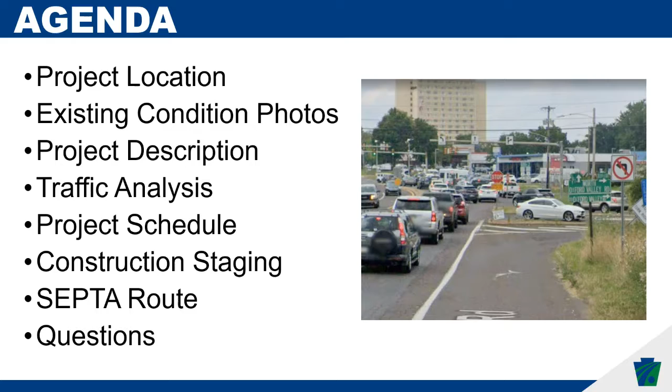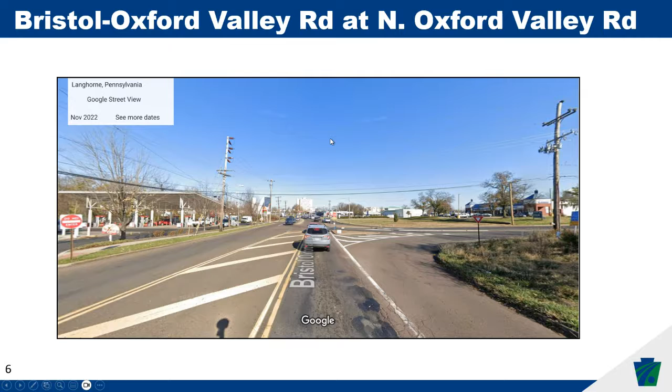This next photograph is Bristol Oxford Valley Road at North Oxford Valley Road, the southern portion of the project. For those familiar with this, Bristol Oxford Valley Road has a stop condition. You have Wawa and the beer distributor on the left, and additional buildings over to the right. Again, this is the same location, looking east down North Oxford Valley Road. This is the area where the majority of the work will take place. This intersection will be realigned, and there will be the creation of a new signalized intersection, which I'll show on the next couple of graphics.

So I'll go into a couple of graphics here that are blow-ups of this overall conditions plan.

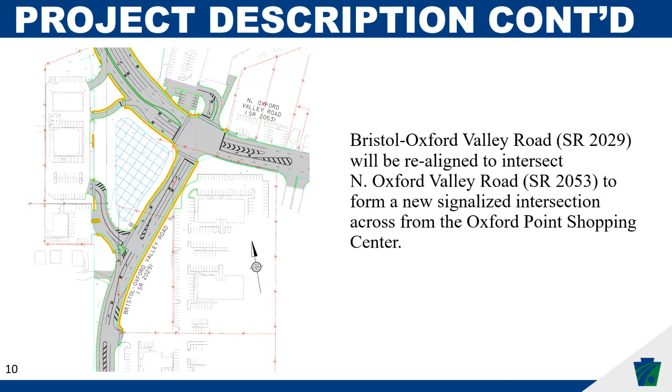Some additional improvements of the project include modification of curb radii and concrete islands, new curbs, sidewalk, and ADA compliant curb ramps. Existing traffic signals and mast arms will all be replaced.

Traffic signal improvements will utilize an adaptive signal system which adjusts the timing of red, yellow, and green lights to accommodate changing traffic patterns and helps ease traffic congestion. There will also be new drainage structures such as inlets, manholes, and pipes installed throughout the project limits.

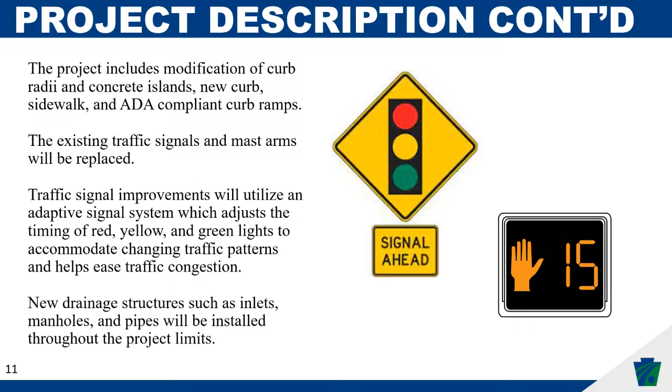Looking at the first intersection, Lincoln Highway and North Oxford Valley Road, in the existing condition during the AM peak, you experience a delay of approximately 32.6 seconds. This delay is an average across the entire intersection. There may be slightly more delay on one leg than another, but as an average you're sitting there for 32.6 seconds. In the proposed condition, it improves to 26.1 seconds.

In the midday peak, existing conditions, you experience a delay of 40.8 seconds, improving to 29.8 seconds. In the PM peak, existing condition, you would experience a delay of 42.5 seconds, improving to 31.9 seconds.

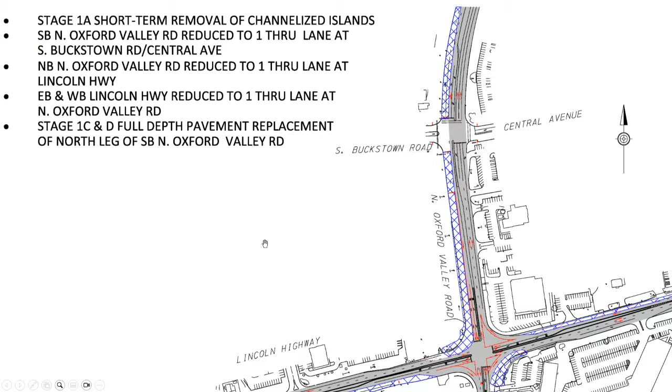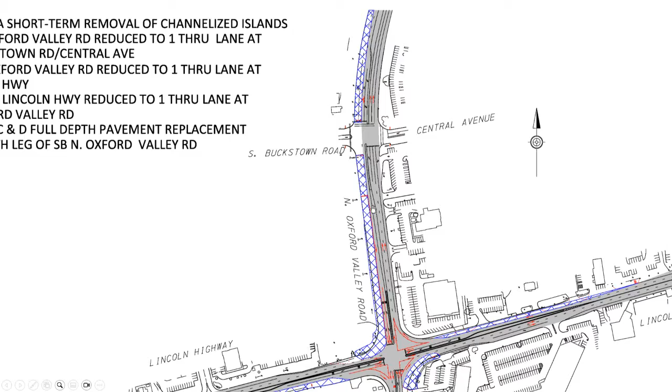Southbound North Oxford Valley Road is reduced to a single through lane at South Buckstown Road and Central Avenue. We're doing widening on the west side of the north leg of North Oxford Valley Road, and in addition to this corner, we need to drop one of the two through lanes to a single lane by the time you get to this intersection, carry it through the construction zone, and down to this portion to the south.

Because we're doing work on these corners, we need to reduce lanes in both directions on Lincoln Highway to a single lane through the construction zone. Approaching from the west going east, you drop to a single lane through the construction zone and open back up to two lanes once past it. Similarly in the westbound direction, we drop two lanes down to a single lane, carry that through, and open it back up once you get through the construction zone.

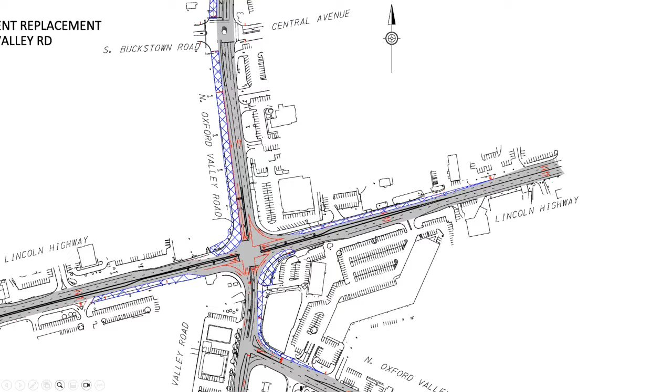Two other stages that aren't shown are Stage 1C and D. Looking at the northern leg of North Oxford Valley Road, there's a need to replace the pavement in full through this stretch, so there'll be single lane reconstruction going across the road. Those aren't shown here, but the traffic patterns will be as shown, with a single lane in the southbound direction and two lanes remaining in the northbound direction.

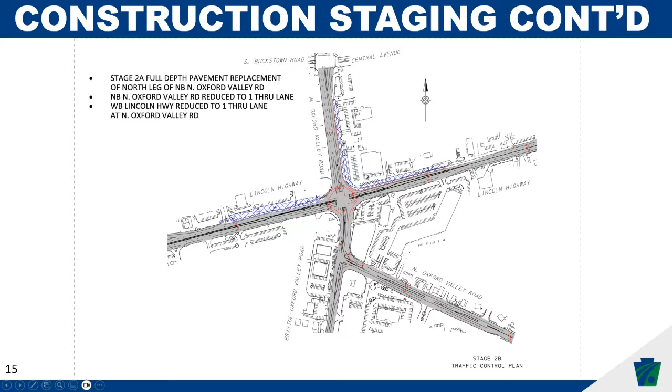Moving to the next stage, this is Stage 2B. Stage 2A is full depth pavement replacement of the north leg of North Oxford Valley Road. We have to finish out the widening of this piece of road, so there'll be a single lane here that has to get constructed before we move on to the widening areas to the east along this north leg of North Oxford Valley Road.

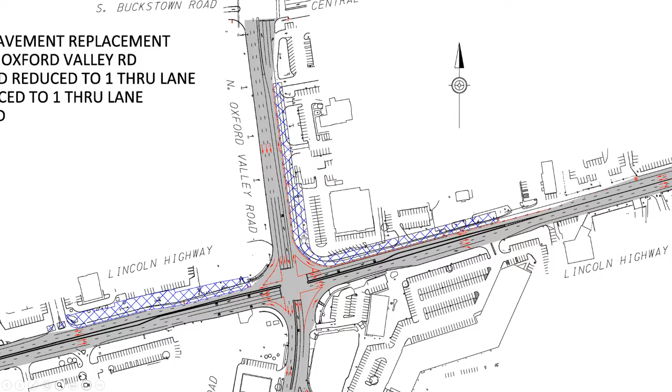We're also doing widening on the north side of Lincoln Highway. Similar to the previous stage, because of that widening, we have to reduce the westbound lanes to a single lane on Lincoln Highway through the construction zone, and as soon as we can, we open it up to two lanes, which continues as two lanes, similar to existing. The eastbound direction matches what's out there currently and will be during this stage, as will the southern portion of the project. No change to the traffic during this stage.

Stage 2C and D: eastbound Lincoln Highway is reduced to a single lane. Similar to the other stage where we were working on the north side of Lincoln Highway, we switch and do work on the south side, which requires us to drop this to a single lane through the construction zone, opening back up to two lanes. The westbound direction will match existing, with two through lanes through the entire construction zone. Again, there's no change to this east-west leg of North Oxford Valley Road and Bristol Oxford Valley Road, and this little piece of North Oxford Valley Road.

Stage 3 is our first short-term operation. What I mean by short-term is it's something the contractor can do at night. They would likely take one of the lanes next to the construction zone and have it back open by the morning commute. In this stage, we're removing the existing islands on Lincoln Highway and reconstructing new ones. The contractor will do what they can overnight, then put barrels back into their construction zone and open the lanes back up so that during the entire day there wouldn't be any restrictions of lanes during this stage.

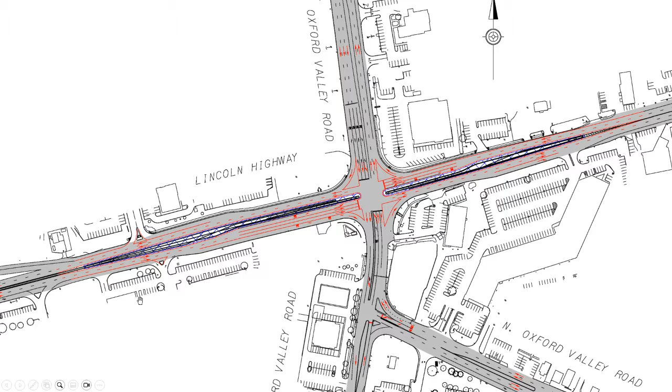Stage 4 is another short-term operation. This is where we're removing the existing median on the south leg of North Oxford Valley Road. Again, this will be nighttime work. The contractor would likely restrict around the construction zone and then have it back open by the morning.

Before I jump into stage 5, I'll say none of this is set in stone at this point. We're still working through our approval process on the traffic control.

Stages 1 through 4 will likely be done as part of the first construction season, and then we'll shift to the south portion of the project where we're doing the majority of the realignment for Bristol Oxford Valley Road and Oxford Valley Road as it connects to Lincoln Highway. That would be done during the second construction season.

As you can see here, there are significant construction zones. We're going to be realigning Bristol Oxford Valley Road as it approaches Oxford Valley Road, and then Oxford Valley Road will get built as it approaches Lincoln Highway.

The key point with this stage is that the northbound movement here, anybody trying to go north to get to Lincoln Highway, will have to be detoured. That's because of grade differences and width differences — we're not able to provide enough room to have dual movements of traffic through this.

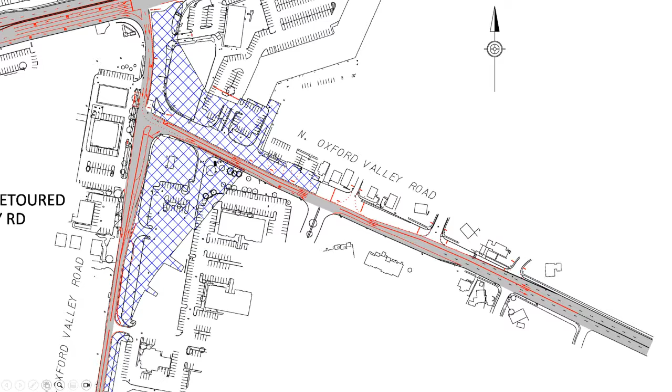Next stage is stage 6. This is again a long-term operation. By this point, we've already fully built out Lincoln Highway and the north leg of North Oxford Valley Road. We start to, or finish up, our work for the reconfigured intersection.

You can see here the reconfigured intersection, as far as the signalized portion of it, will be operational during this stage. It won't be at the full lane widths we'll have in the full build-out, but it will provide a signalized option here.

If I zoom in on some of these here, coming up Bristol Oxford Valley Road, you have a single left turn lane, a through lane, and a right turn lane.

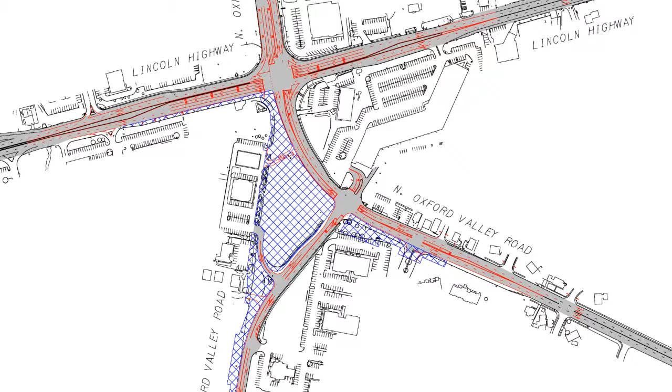I should also say that any commercial operation within the limits of the project will have access maintained through construction. It will be on the contractor to provide or allow access at all times, regardless of whether it's in front of a construction zone or not.

The last thing I'll point out on this stage is, even though we have the full width built on Lincoln Highway for this dedicated right turn lane going south, we have to barrel that off and not allow access because of the work we're doing on the corner. So the outside through lane will become a shared through-right turn lane to get south.

And then our final stage, this is stage 7. Again, this is a short-term operation that will likely be done at nighttime. You have northbound and southbound North Oxford Valley Road new median construction, new channelized islands construction in the middle of the intersection, and then final paving, striping, and sign installation will occur.

So if I zoom in on this to let you see a little bit better. Again, this is construction of the final medians on North Oxford Valley Road, the pork chop islands in the middle here, and then full overlay, any final pavement markings and signing will be installed as part of this stage. And just to rehash, stages 5 through 7 we anticipate would likely be in the second construction season.

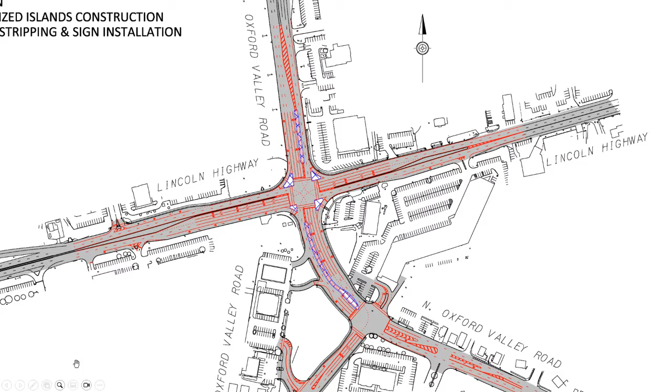As far as the detour timing or how long the detour would be in place during stage 5, I would anticipate that would be - going back to it here - stage 5 is because of the prevention of the northbound movement. I would anticipate that this will at least be in place for 3-4 months possibly.

We have had some coordination with SEPTA in the last week, and they have told us that there is a possibility this route will not be in operation as of 2025. They're still working through some detour details. There's low ridership on this particular route. They did say the route itself would not disappear - they would go to an on-demand route, and they're still working on the details of that, as far as where those stops would be. But as long as this route is in place during construction, we'll make sure we maintain all the bus stops that are out there.

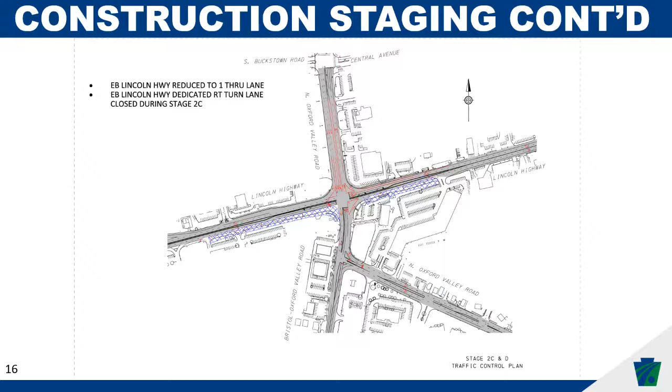So the first question is, how many construction seasons will the project take? Okay, Brian, so you published that one? There you go. Yep, so I'm not going to go through every question that has scheduling - we'll just kind of go through that whole schedule question, so I'm not ignoring your questions. Right, so this is on. Yeah, sorry, go ahead. This is on slide 13.

So just to rehash this again, we anticipate that this project will be over 2 construction seasons. We anticipate construction starting in early 2025, lasting through at least October timeframe, depending on weather. Sometimes that can last longer, depending on what the contractor needs. So we anticipate that construction will last for 2 construction seasons.

Okay, thank you. So it would basically be starting really at the beginning of 2025 and ending at the end of 2026. Correct.

Okay, the next question - I know you mentioned there's a link to the slides in the chat, but I guess there's a question regarding whether there's a recording of this meeting. Yes, this presentation is being recorded and will be posted to the project webpage. So in addition to the materials presented during this time, like I said, this presentation is also being recorded, so you can rewatch it at your leisure. Thank you.

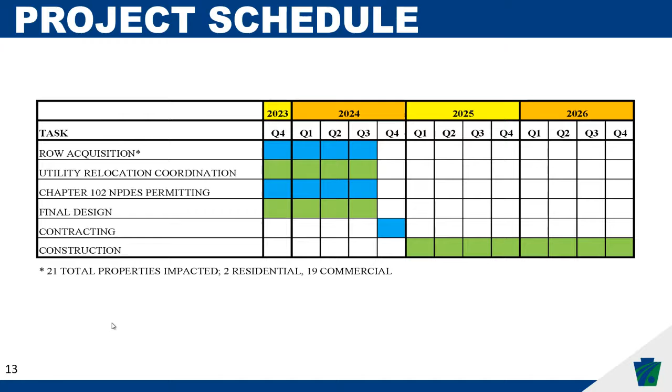Let's see, the next question is regarding the delay that you had posted at the intersections. Why can't we do away with the delay in its entirety? I'm going to throw that to Brian Keaveney, if you could help out with that.

The reason we can't get rid of delay, and Brian, please correct me if I'm wrong, is the amount of traffic we have. We're trying to optimize our signals to move traffic around as best as possible. The only way we could get rid of delay is if we basically got rid of the traffic.

I think that's a good summary, Brian. What I would add is the delay we're reporting is the average delay per vehicle that goes through the intersection, multiplied by several thousand vehicles, almost over 4,000 during the weekday afternoon peak hour. The reduction in delay is substantial when looked at over the total number of cars through the intersection. What this represents is that although many cars may free flow through these intersections, some will be stopped simply due to the nature of traffic signals always having one red phase.

So some traffic will be stopped, whether on the minor approach, major approach, or in the left turn lanes, at some point in time. That's what this average delay is a reflection of. Thank you, Brian.

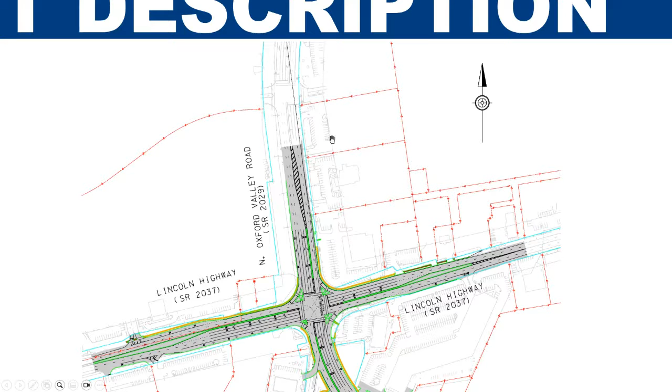Thank you, Brian. The next question is about access to and from Center Street for the residents. Asking if there will be medians preventing left-hand turns in and out of Center Street. Will emergency response vehicles be able to access Center Street from either direction without being impeded by medians and traffic blocking the street? Will there be dual left turn lanes for residents of Center Street and Oxford Crossing Liberty Drive? And will there be a 'do not block the box' painted on North Oxford Valley so that traffic is not constantly backing up from the new light, blocking the entrance and exit of Center Street?

I'll publish that. So it's kind of a lot of questions in one there. I'm going to zoom down so I can see the question. So Center Street—I believe Center Street is up here at the top, correct? Is that the location we're talking about? No, Center Street is just south of the new signalized intersection. Sorry.

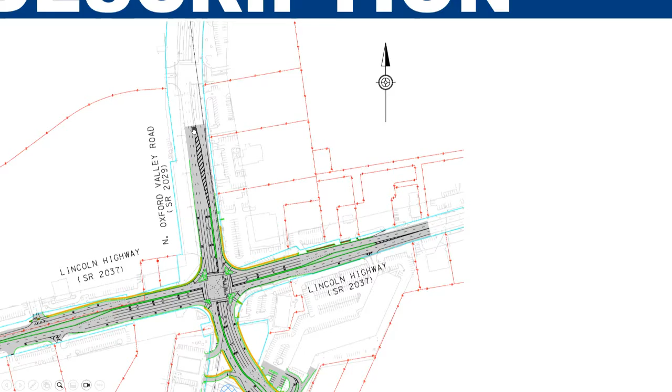Yeah, right there, this location here. It's almost right across from Liberty Drive, but a little offset from it. So it's on the other side of the street from where you just pointed, Brian. It's a very small road - you can barely see it. Those are the two property lines. That's Center Street, so I think that was from the traffic control staging.

You kept that pretty much open. Correct, you would keep access to it at all times in your staging. And I guess the question is asking if we're going to be putting in permanent medians there. At this point, our design does not involve medians in that location.

So you can see here if I zoom in - I think I'm already zoomed in - we have some hatching in there to separate the left turn lane into this development down here. But no, there will not be any permanent medians there to prevent people from lefts. I don't see that anybody would try to make that left. Maybe somebody would, but because we have that left turn lane going into this site down here to the south, they'd have to go across a bunch of lanes illegally to make that left.

Second part, I guess - what's the second part? Will there be a dual turning lane for residents?

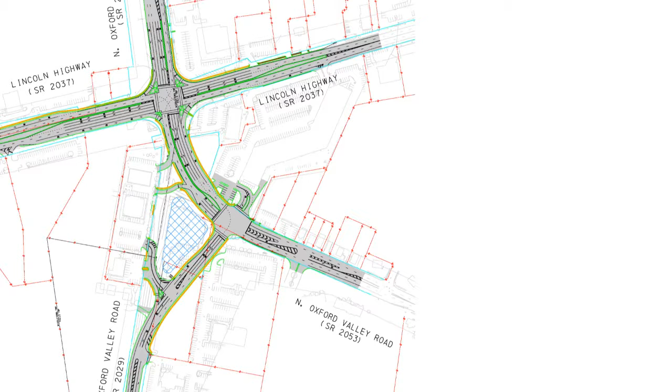I think this might be a question that we'll have to get back to you on. If you could fill out the online form for us with your contact information, we can certainly get back to you in more detail. I don't want to hold up everybody without having the exact answer for you right now, but we can certainly look into this and get back to you with a specific answer.

So the next question is regarding Terrace Road, which - let me go to the detour - is on the detour route. Yeah, it's on Bristol Oxford Valley Road, south of Wawa. So it's this road here. Right, so the question is...

Terrace Road in Twin Oaks is already a major cut through for unwanted traffic, which the police do nothing about, ignoring complaints of excessive speeding and stop signs. Will there be an emphasis on making sure this is controlled, considering once this project starts it is only going to get worse?

I guess during construction what we'll do is have signs up there - we can't necessarily prevent people from making that movement. If it's local traffic or whatever, they're going to know that's possibly a cut through. We'll definitely put up signage to help prevent that. We can also work with the local police to police it, to make sure there's no cut throughs or excessive speeding. There may be an opportunity to put temporary safety measures, speed bumps or something in there that will make people's lives a little bit not fun during construction. I don't know if the residents would be interested in that - we'd have to coordinate with them. So we'll do everything we can within our power to sign it as not a throughway, but there really is no way to prevent it as a cut through.

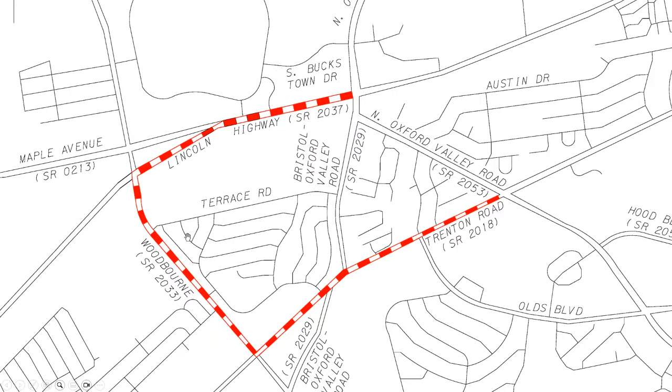The next question is just regarding the overall traffic during construction, especially on the southern half of the project. Should people just avoid the intersection altogether, or is there any other way to get around?

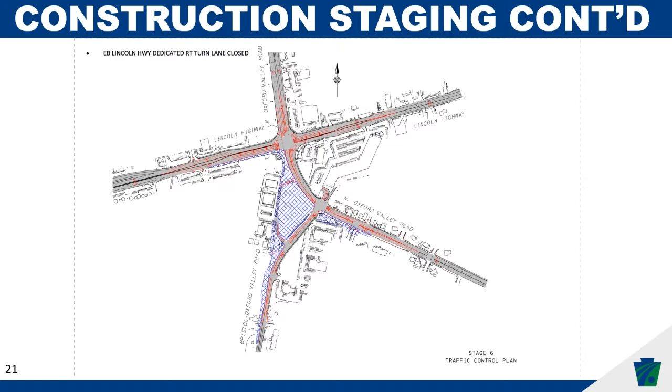I think as part of our due diligence with the traffic control, we will be recommending advanced warning signage and flashing message signs that warn the public to probably avoid the area if possible. Beyond that, I don't think we would recommend any alternate routes beyond what's on the detour itself. But we can again post signs and flashing message signs that warn the public that you're going to be entering a very heavily congested area during construction, particularly during the southern construction portion of the project, like you said - during that detour it's not going to be great.

Again, we're still working through traffic control, trying to see if there's anything we can do by, at a minimum, keeping existing lanes that are out there. During stage 5, I don't think there is any way, because of the width and vertical differences that are part of the construction of that realigned intersection, to make it work. It's just a very difficult, tight area. So there will be at least some portion of this traffic control that's not going to be great - let's just put it that way.

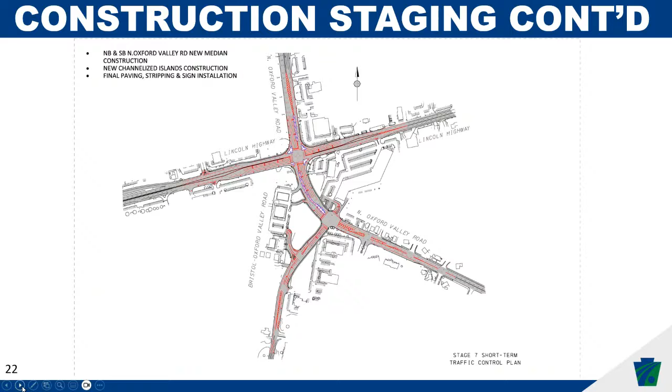The next question: will the right turn lane from southbound Oxford Valley Road onto Bristol Oxford Valley Road at the newly realigned intersection have a green right arrow in the 5-section doghouse style signal, acting in tandem with the northbound double left turn lane? I'll publish that so you can read it.

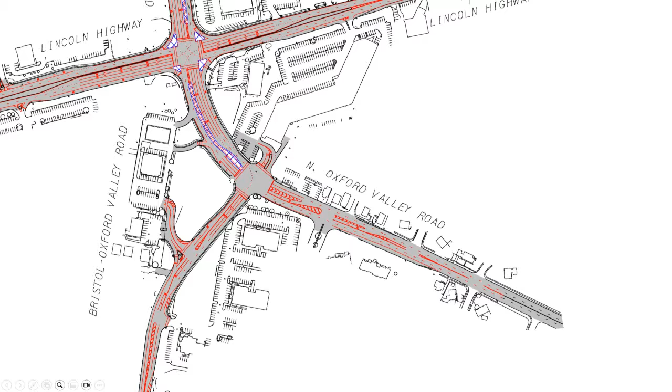The right turn lane from southbound Oxford Valley Road onto Bristol Oxford Valley Road - so this is this turn movement here. Brian Keaveney, do you know if this will get implemented? Yes. So the intent is to have that overlap phase implemented at this intersection, to move right turning traffic around that corner while the left turn is turning from Bristol Oxford Valley Road onto North Oxford Valley Road. So the answer is yes.

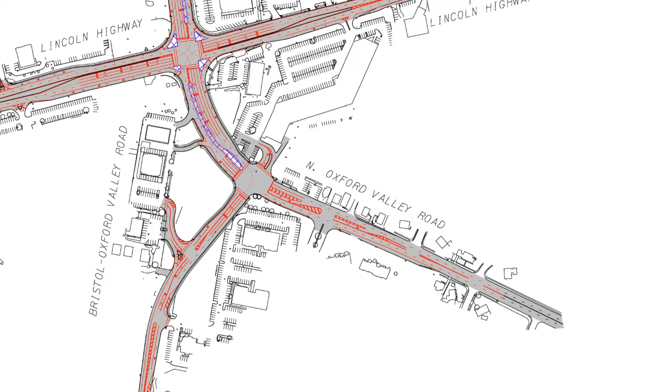Okay, thank you. Next question is, will sidewalks be fully installed along the new road? Currently, that intersection is not walkable, and the only sidewalks are in front of Wawa and Patient First. This area could and should be much more walkable.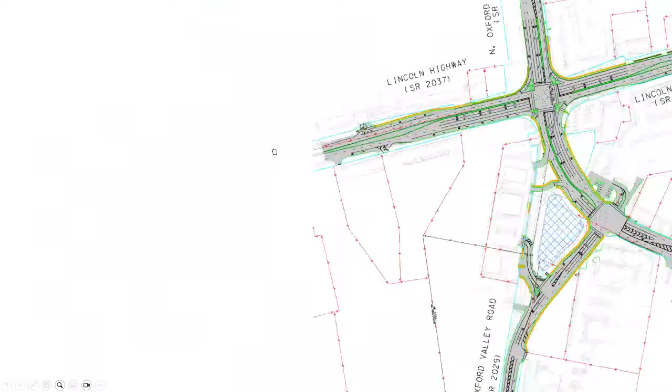Brian Keating, can you take that one? Sure. So I think we're talking about that link between the intersections and looking at the forecast future volumes and the anticipated signal operation. We do predict that the queue lengths will stay within the two intersections and not spill back between them.

Additionally, I would add to the earlier comment about Center Street, in looking at the queuing or stacking that occurs in the current condition on that approach on your graphic, Brian. So from the bottom right, heading up North Oxford Valley Road, that queue, once this realignment is done and the signals installed, should reduce fairly substantially.

So today it looks like it's probably a 500 to 600 foot queue on average, and once the realigned configuration and the signal goes in, that queue is anticipated to go down to less than 400 feet, which will be less than the distance from Center Street up to the traffic signal. This is approximately 400 feet. So it would be that, like Bryce said, that queue would not extend over the road.

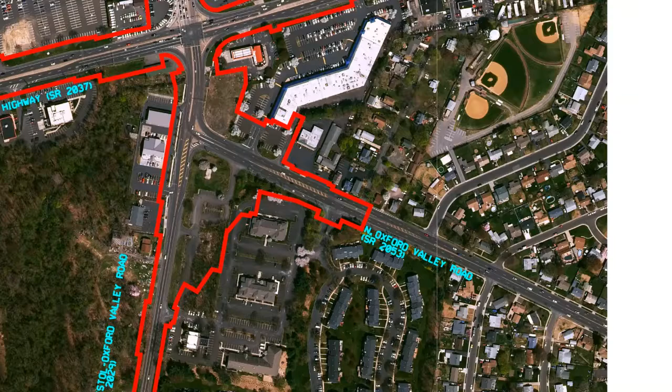Another question regarding the Twin Oaks residence, which I believe is off of Terrace Road, questioning the need for the new traffic signal at Bristol Oxford Valley Road, and removing left turn access from North Oxford Valley Road to Bristol Oxford Valley Road. We can't turn left on Woodbourne. I'll post that here so you can read the whole question.

I'm not exactly sure how to answer that one. If you could post that online for us, we can get back to you. Please provide your information so we can specifically reach out to you and investigate your question. Thank you.

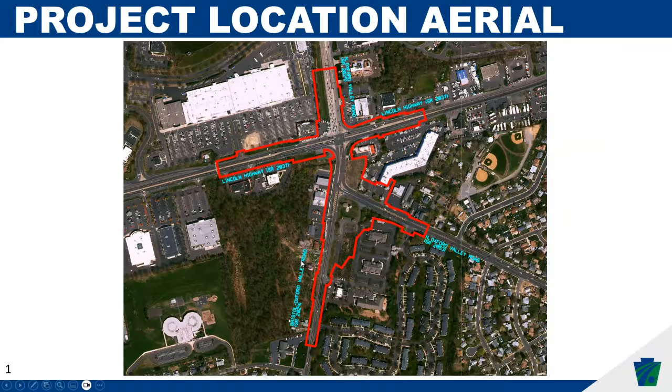Will Woodbourne Road and Trenton Road traffic light be modified to deal with additional traffic from the detour? What's that one? I thought I did.

As part of the detour route, we will analyze the existing signals that are part of the detour route and make sure that they're optimized. If there's any improvements that need to happen along the detour route while this is in place, that would be part of our project. Thank you.

Will you work with Waze to make sure that automated routing is not directing traffic to closed or blocked legs? I don't know if I can answer that question. I'm not familiar with working with Waze, but we can certainly look into it.

We'll provide the detour route so that you're not utilizing some GPS that's taking you down a closed route. Typically when I use my phone for maps, if the road is closed, it will not take you that route. It'll know that it's closed. But I'm not sure exactly how that works, or anyone would have to consult them on that. I don't really know how they get that information, so I guess we'll do everything we can on our side to make sure it's public knowledge of the closed roads.

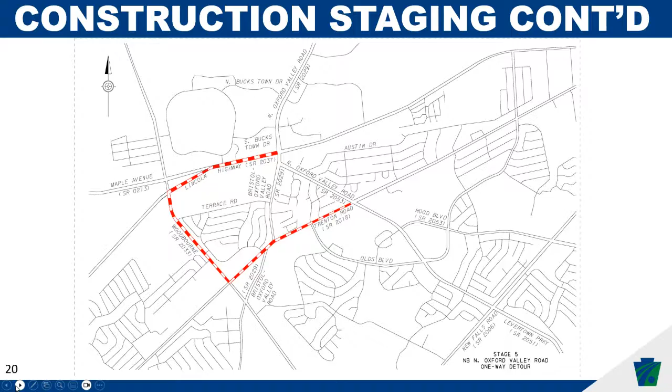The next question is asking if a 5-point style intersection is being considered instead, since traffic at the new light will back up through Route 1. I assume this is a question for the main intersection, a five-point intersection. I'm not exactly sure if I understand what would be the fifth leg.

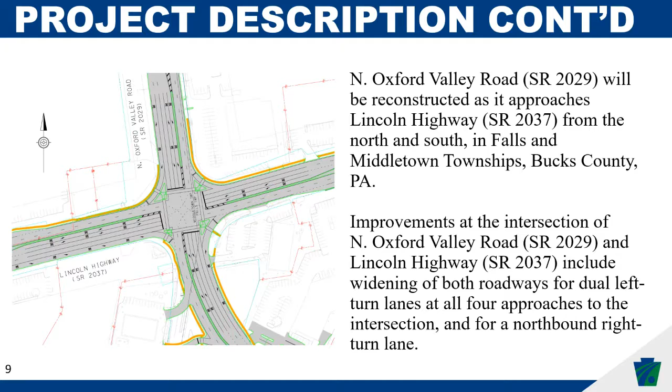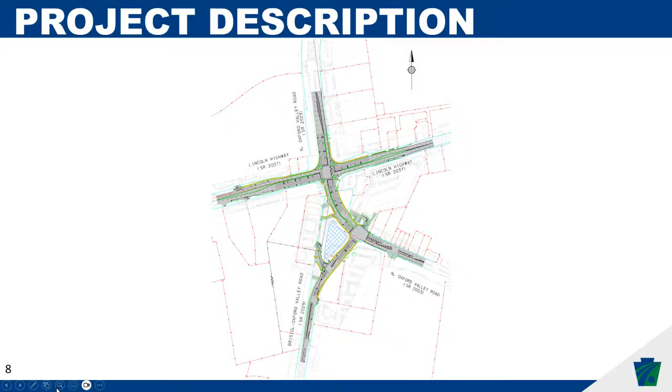Ryan, I can take a shot at that. If I'm reading it correctly, the question may be why doesn't Bristol Oxford Valley and North Oxford Valley come in on the south as two separate legs so that it'd be a 5-point intersection? Traditionally, intersections that have existed that way have been much less efficient, because the fifth leg requires a completely separate traffic signal phase set of green, yellow, red time, which dramatically increases the queue on the other approaches. So by its nature, a 5-leg intersection, particularly one with the volumes we see here, will be less efficient than the proposed 4-leg intersection.

The other aspect to consider is that the realignment will increase the space between the intersections. As I mentioned before, that will assist in providing storage to queue vehicles between the intersections and minimize the impact one has on the other. So both intersections are going to operate as more conventionally configured and aligned intersections, with all movements clearly accounted for and ordered through the signal. We think this configuration is safer and much more efficient than a 5-leg would be.

Thanks, Brian. The next question is asking the origins of the project, who initially approved it, and maybe just to go over why the project was needed altogether.

Well, to touch on that, obviously there are traffic issues out here. That's one of the main reasons why the project was developed, and this project literally goes back 20 years. Traffic has probably gotten worse over the years from what it used to be, but the main reason for the project need was traffic congestion.

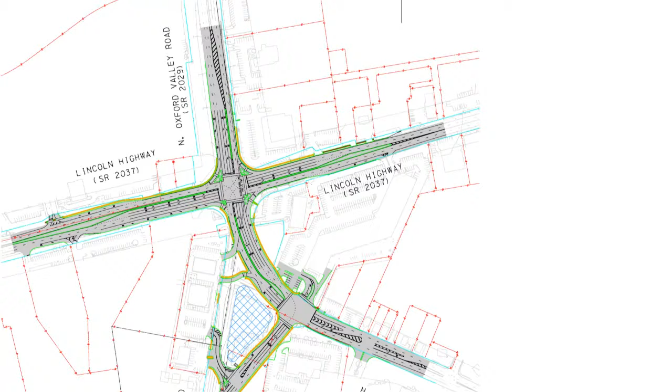That's actually it, I don't have any further questions at this time. It's almost perfect - we're getting towards the end of our one hour here. So I'll move forward.